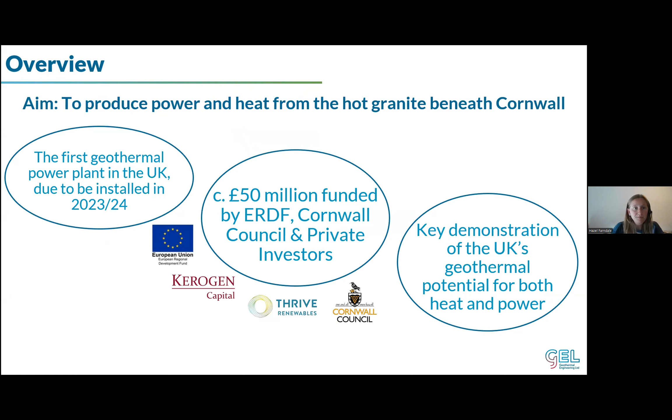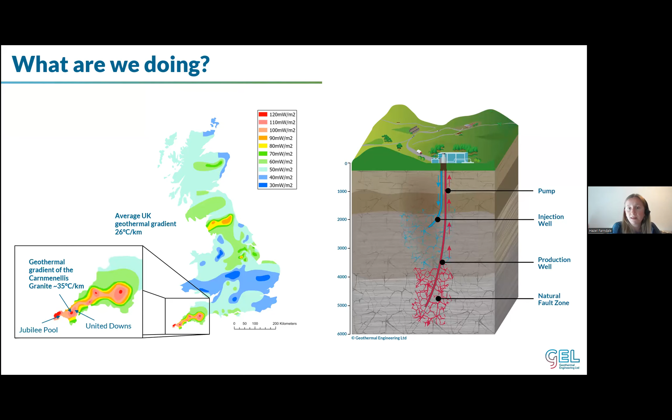So then on the right-hand side, we've got a schematic diagram of what we're doing at United Downs. So we've drilled a geothermal doublet, and that is a deep production well down to about 5 kilometres depth, which is penetrating into a natural fault zone. That is where we will be sucking up the hot fluid from at about 180 degrees Celsius. We've got an electrical submersible pump about a kilometre down the well. It'll suck up the fluid to be used in a binary power plant, which can then be re-injected after it's used to a bit more than 2 kilometres depth.

So why are we doing it? I just think this is really important to share, particularly to those new to geothermal, the 3 key benefits that we see of geothermal. So firstly, it's incredibly low carbon. One estimate of a lifetime carbon assessment of deep geothermal in the UK showed that the carbon intensity is less than 5 grams of CO2 per kilowatt hour. Now you compare that to the recent UK government stats on 2023 grid electricity, you can see that was 207 grams of CO2 per kilowatt hour.

It's been estimated that around a 5 megawatt plant can save around 700,000 tonnes of carbon compared to gas over its roughly 30-year lifetime. So it's a really significant saving, and that's more than solar and wind, as well as the obvious fossil fuels. It's really low impact, so it takes up a really small amount of land, particularly when you compare it to things like solar PV, but also a number of other technologies as well.

And it's a secure energy supply. So it'll give you base load, almost 24/7, 365 days a year power and heat, only offline for a week or 2 every year for maintenance. So it gives us that energy security that over the last couple of years in particular has been really, really important.

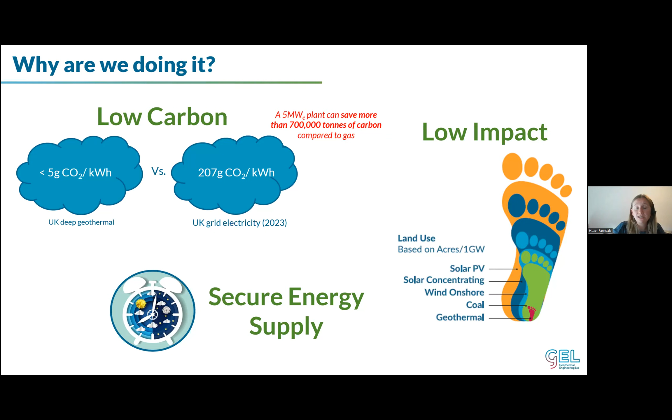What's been really great about this project is whilst the key aim was to generate power and to prove that it's possible, there's also been a number of additionality projects that have come off the side of it. So the major one being that Cornwall Council has really embraced geothermal and wants to connect our United Downs plant to a new housing development called Langarth Garden Village, which is about 6 or 7 kilometres away from the plant. Their aim is for it to be the UK's first essentially zero carbon housing development.

And maybe a month ago, the project received £22 million from the UK government's Green Heat Network Fund. So it's really great to see confidence in geothermal in the sector and its opportunities growing and growing.

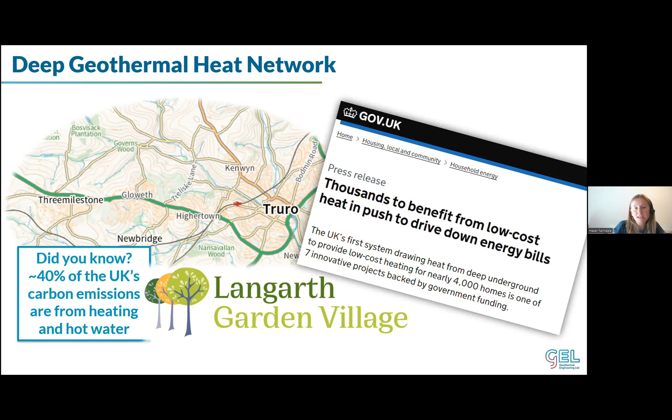So these really exciting projects give us an opportunity to use and harness the expertise of the academic world as well as other industry players in a number of topics that perhaps as a small and growing industry, we haven't had the capital to invest in ourselves. So they've been really fantastic opportunities along the way.

And then just to touch on some future developments, because now that we're most of the way through the United Downs project, we'll have the power plant there very, very soon. It's been a really optimal time for us to secure funding and move forward with plans for rolling this industry out across the southwest of the UK. So our aims are to generate low carbon, 24/7 power, heat and lithium across a portfolio of relatively small power projects throughout the southwest. Each project will be around 5 megawatts in power, and therefore about 20 megawatts in heat.

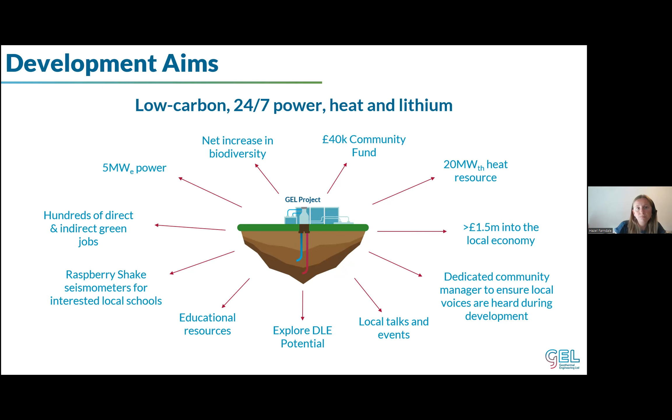That's really important. So we need the granite and we need a fault zone to be able to get the permeability that we need for resource. But particularly in Cornwall, we also need to be able to access the site with a very large rig, which essentially means we need to be within 1 or 2 kilometres of a major A road, preferably just off the

A road. We also need access to a grid connection, which is a real problem here in a lot of the UK, but particularly down here in southwest England, because a lot of the grid infrastructure is not fit for purpose and cannot support any additional connection.

And we also need to be away from environmentally sensitive areas, whether that's SSSIs or AONBs or any number of acronyms you can think of, which is particularly difficult in an area of the country where, I think, a third of it is covered with areas of outstanding natural beauty, and that's just one of those sensitivities.

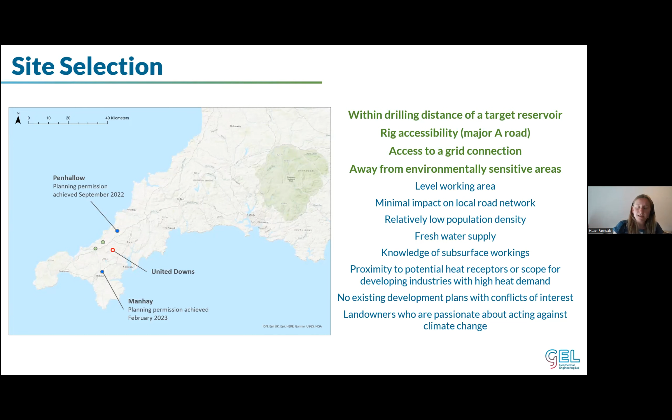There's then a number of other things I've listed out here in blue, which are sort of ideals, and absolutely we need them for a site, but they're sort of the next level down of priorities. And not least, you need a landowner who is willing to lease or sell you the land, which generally means they have to be quite passionate about climate change, because a lot of landowners down here do not want to see their land turned over to development.

So our plans for these new sites as we move forward is that once we have a site selected and legals put in place, then we want each site to take around 3 years from the planning through to power plant construction and completion. Now, each phase, of course, will really depend on a number of factors, the results of initial surveys, the availability of key equipment, which of course is highly dependent on the oil and gas market.

But in general, it can be done with about 6 months of site preparation, 6 to 9 months of drilling, and that's 2 wells, testing and development of up to about 6 months, and then power plant construction of about 14 months. So if you can plan well, you can get that all done in 3 years.

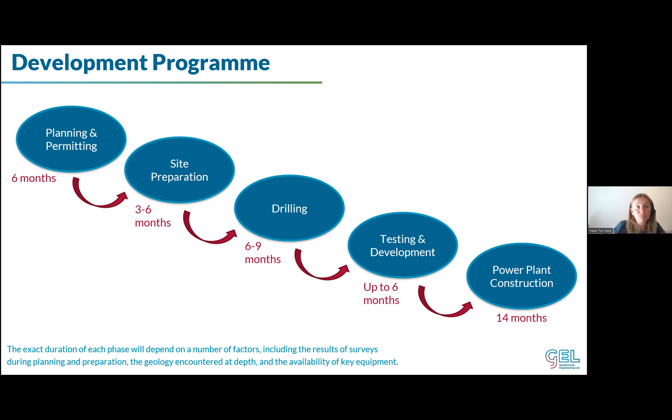Then the plan is that we use the same rig and we shift it and we drill consecutively at each site. So we'll do 2 wells and then shift it just down the road and drill another 2 wells. And this will significantly decrease mobilization and demobilization costs for us, which is really, really important for a small and growing industry.

So my final slide is just that there are a number of challenges for the industry, but one that I wanted to pick out is that we really require support, and that's at all levels. Because it's a new industry, people don't know that much about geothermal here in the UK. There's a big education piece going on and it will continue for many years, no doubt, with all

levels of government and the different ministries and departments, with our local council, which down here is Cornwall Council, and that's at many different levels because people don't tend to talk to each other. So you've got to do it at the cabinet level, at the planning and development team level, and of course at the parish council level as well. Then we also need to have this education spread out through the different regulatory bodies.

So here I've just listed out a few key ones: the Health and Safety Executive, the Environment Agency, and the North Sea Transition Authority, who all potentially have input into the well designs, how you run a site, and of course the environmental risks potentially associated with it. So they need to understand what a geothermal development can look like and how a good one should be done. And that's all underpinned by local community acceptance as well.

A big part of what we've done at United Downs and will continue to do is getting the local community on board, because their opinion matters and it feeds into the parish council and therefore the planning team and the council cabinet's decisions. And essentially, if you can't get them on board, your project can be stalled for many years and potentially forever. So having all of the support is really, really key to the industry moving forward. So I've raced through that.

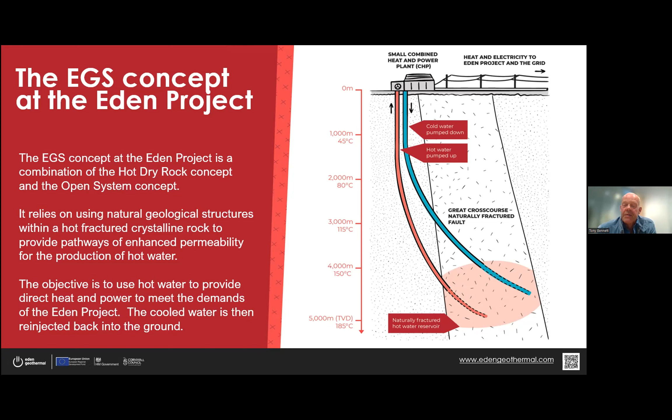What we've done after 3 years is we started off in October 2019. Initially, because we had to follow very stringent European protocol about how we acquire services and equipment, it took us a year to go through tendering services, raising contracts, all within European guidelines for all the services we need. And if you're familiar with the services required with oil and gas drilling, we were looking at very much the same thing. So it's bringing together not only a drilling rig, but all the services to go with it, all the supply chain to keep that going. So that took us about a year.

We then had to prepare a drill site. We knew we were going to have a 450-ton drill rig on site. So this needed to be a level site of about 12 to 15,000 square meters to accommodate the drill rig and the working area around the drill rig, to have a one-way transport system through, plus all the cabins and facilities that had to go through that. That took us a further 6 to 7 months.

And then we started drilling the first well. We anticipated the well would take about 150 days to drill down to about 4,500 meters vertical depth. We ended up doing it in about 165 days. The drilling went very smoothly. In retrospect, there were no fishing operations, nothing like that. It went pretty much to schedule. So it went slightly over budget. However, we were hampered really badly by having to do this while Brexit was going on, and also in the middle of the COVID pandemic, all of which just added a nightmare to an already technically quite difficult program.

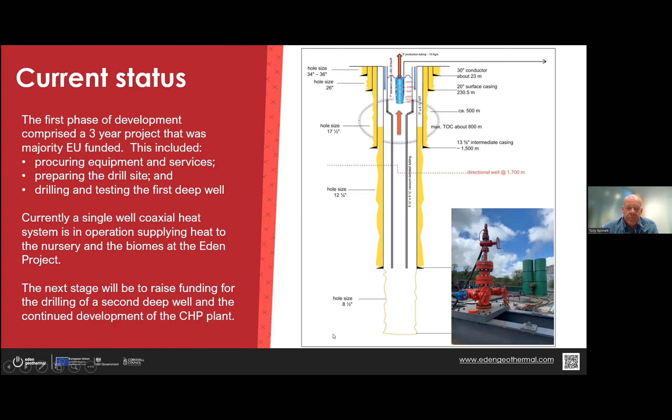So what have we achieved during this time? I think it's really important to emphasize we've drilled the longest, not the deepest. United Downs has drilled the deepest geothermal well in the UK. We have the longest one simply because we went at slightly more inclination. We've gone down to a depth of 5,200 meters measured depth. We've demonstrated we can drill these tight, long deviated wells in hard crystalline fractured rock without any major technical issues.

And that's a huge step forward, because when we were initially looking for funding, investors were saying, well, why do we want to fund an exploration well with a technical risk that you're never going to achieve the depth you want? Because it just hasn't been done that often. So all this has helped build up confidence about that. We've managed to carry out well testing. We've used airlift production test techniques to demonstrate productivity.

Seismicity is a big issue with geothermal development. So we've demonstrated being able to monitor accurately what seismicity is taking place and to use that as a control measure for well testing operations, so we minimize the likelihood of getting felt seismic events. Having said that, we did have one felt seismic event during our well testing. We've also carried out a small acid treatment to try and reduce the near wellbore impedance.

And we've run the deepest coaxial system in the world, we believe, putting down 3,800 meters of coaxial tubing and demonstrating how that works. So we've improved the understanding of drilling, seismicity, and the geological uncertainty that goes with geothermal. Having said that, there's still risk impacts that we need to address.

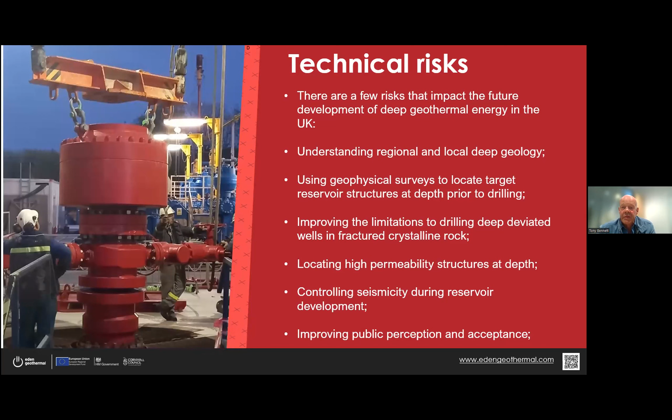We need to also enhance our ability to control seismicity during the development stage of deep geothermal. And as part and parcel of that, as Hazel's already alluded to, we have to bring on board public perception and acceptance of deep geothermal. And I think in Cornwall, certainly there is a really good public perception and acceptance of it. And that needs to be improved as we go on. We need successful projects if we're going to get this accepted within the UK and to get it as an important part.

Up till now, geothermal in the UK, especially deep geothermal, is way behind what's happening in other places in Europe. We have to bring the development costs down, especially the drilling costs. We are governed by using oil and gas technology, and therefore we end up having to use oil and gas related prices, and that really does restrict the ability to take deep geothermal forward.

There needs to be government incentivization for private investment in deep geothermal, which has been lacking within the UK government. And I don't want to get political over this, but I think had it not been for EU funding being available, neither project would have taken place in Cornwall.

We need to facilitate the ability to export power. At the moment, the national grid is woefully inadequate, especially in Cornwall, for renewable schemes to come online, especially geothermal schemes, and export into the grid. For example, at Eden, at the moment, we cannot get a grid export until 2036. And that really inhibits your business case.

Public relations and perception needs to be promoted, and I think both projects have been well underway on that. Deep geothermal requires a wide skill set. It's the sort of skill set that's readily available within the oil and gas sector, and there's a huge potential here to transition between oil and gas and deep geothermal,

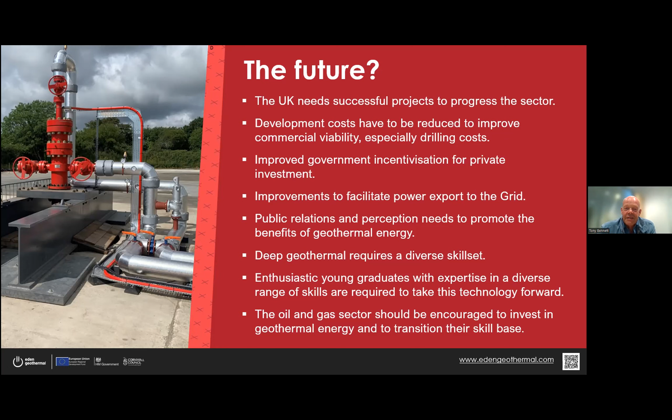both investment-wise and personnel-wise. And what deep geothermal needs, in my opinion, is young people, young graduates with expertise and enthusiasm to take forward this technology, because it's at a relatively novel stage within the UK. And I think there's a massive opportunity here to take it forward. Thanks for listening.

Thank you so much, Tony. Okay, I think we're going to pass things over to David, who is in the same room as Tony. Hi, David. Whenever you're ready, you can start sharing your screen. Thank you, Kate. And thank you, Tony. And by coincidence, Tony and I are in the same room.

We're actually in Geoscience Limited's office in Cornwall today because we're working on a project assessing the potential for heat recovery from flooded mines across Cornwall for provision into local heat networks. So I won't try to share Tony's slides because I wouldn't know what to say, but I have, as Monty Python would say, now for something completely different.

I have spent my whole career so far, which has been decades, trying to understand where and how to do deep geothermal energy and shallow geothermal energy and all variations of geothermal energy in the UK in a commercially viable way. So I run a company called TownRock Energy. We're a team of 12, mostly young, passionate geoscientists and engineers, but with a board composed of ex-oil industry veterans. And we work across all types of geothermal energy resource in the UK.

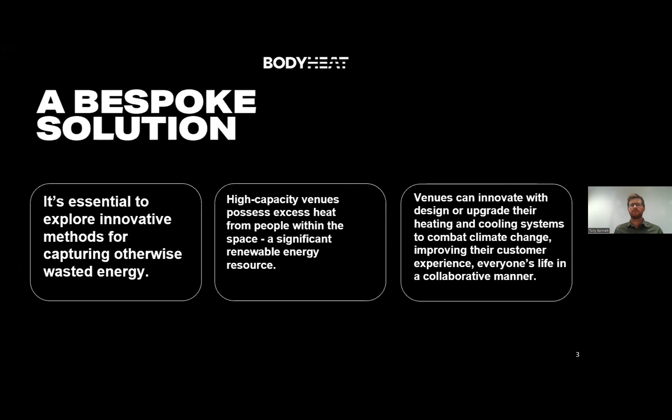There's also a problem that vast amounts of energy is wasted, and much of that waste energy is in the form of waste heat. So exploring innovative ways to capture, store, and reuse waste heat in whatever form it's generated in is really important. The Body Heat solution is designed for high-capacity venues, whereby the source of waste heat is the crowd themselves, especially when dancing to good music. Potentially sports venues, leisure centers, gym classes are another application, or very busy offices. But our focus has been on the venues that have high quality music playing and lots of people attending to enjoy themselves.

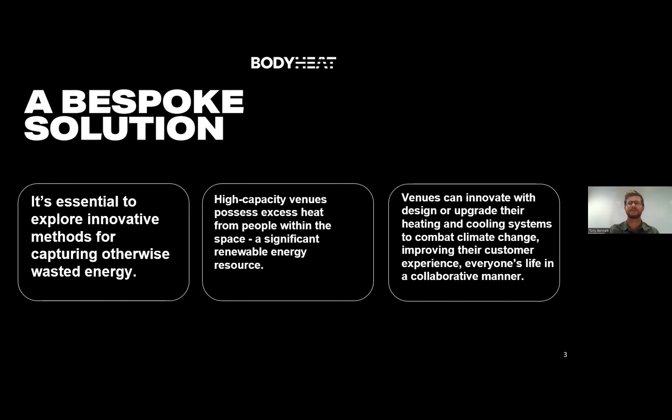One of the key motivators for focusing on the music industry and focusing on dancers is because this is one of those rare climate change solutions that encourages people to do more of what they love, and for the output of that to be a net positive for the environment.

It's a mixed use venue, so there are also other uses during normal hours during the week for offices, art studios, so there's a kind of combination of cooling demands required in the evenings and the weekends, and then heating demands required during working hours.

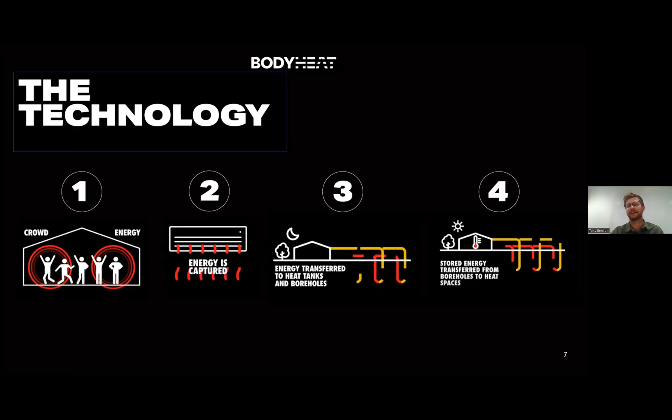The physical infrastructure inside the building looks like a normal kind of air conditioning unit. The plant room is a shipping container that we've refurbished and put 2 heat pumps, a heat exchanger and a number of pumps in. And then we've got about 150 meters of trenched surface pipework that connects to a manifold that then interfaces with 12 200-meter deep boreholes. And they're underneath the community garden on the side of the building.

We've got then a cumulative 2.4 kilometers of conduction-based thermal transfer from those boreholes. So we can be extracting heat from the ground and rejecting heat into the ground, all through conduction by circulating a carrier fluid that's either hotter or colder than the ground that interfaces with the heat pumps in the plant room.

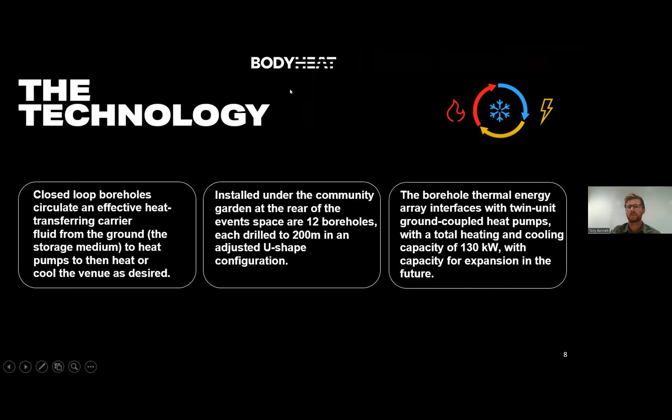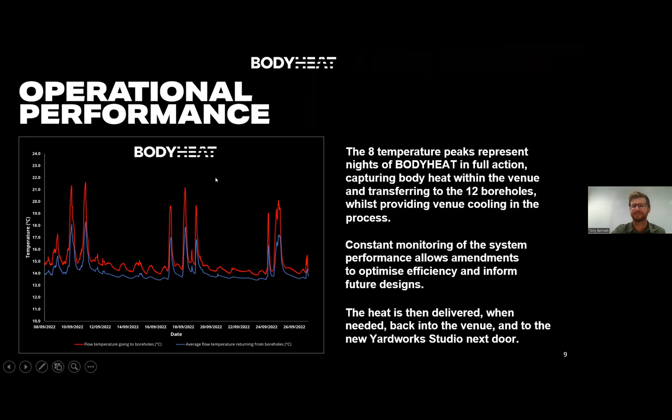We really want to make sure that people don't only have a negative connotation towards fighting climate change. It's got to be fun. It's got to be interesting. It's got to motivate people. And so, yes, behavioral change is necessary, but also this type of solution can be used to get people very excited about alternative solutions as well that are going to be an enhancer of people's lives and improve the way that we live in a net zero world.

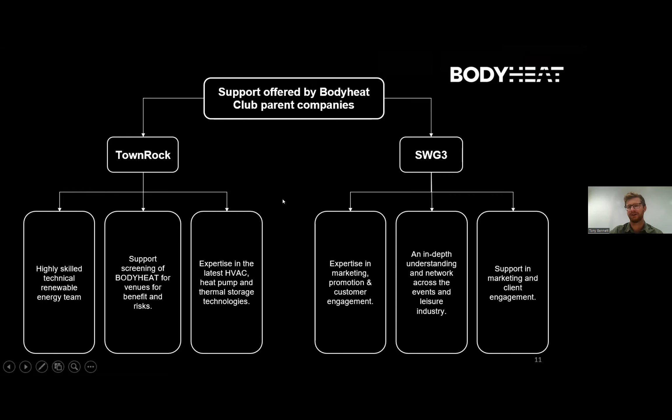And briefly, this has been a collaboration between my company, TownRock Energy, and the venue where we built this, SWG3. And we bring a number of both technical and then commercial and marketing expertise together. And as we optimize and expand the system at SWG3, we're also looking to roll this out to other key venues around the world.

The core technology in the body heat system is off the shelf. But the way that we've integrated it together and the use case here has been the story that the media and the general public have really, really engaged with. So there's a piece of advice here: we don't need to be constantly inventing completely brand new things, but if we're using existing technology and applying it and telling a story about it in a way that gets people really excited,